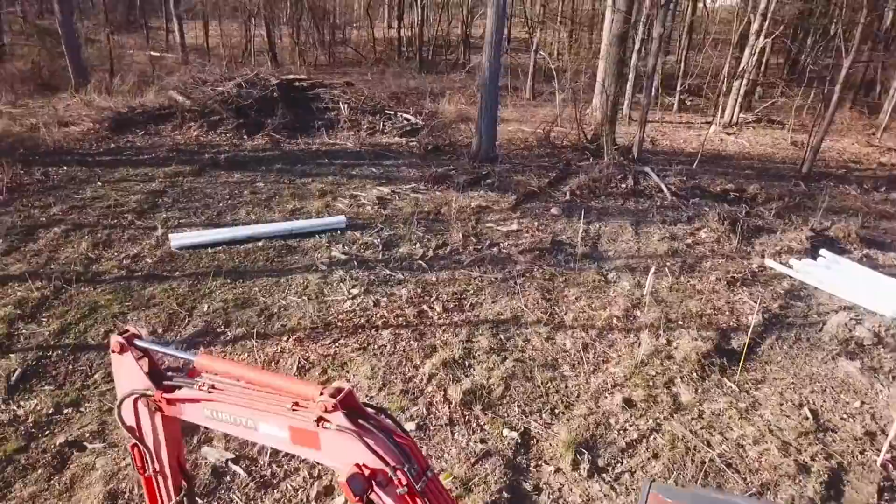Got a conventional septic system, 5 lines here. There's the house, here's the system, leach field, tank up here. Got 5 stakes in the ground, 5 stakes over there. These are going to be 50-foot laterals, conventional septic, so that means we are using existing soil. We don't have to bring in any material. We have the stone and the fabric and the pipe.

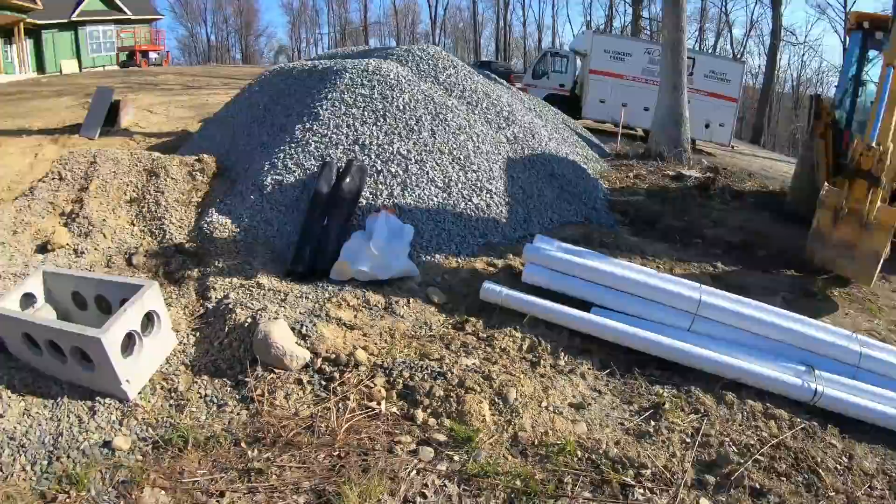There's a D-box. First things first, you are going to dig your D-box, set it to grade that you want, 20 inches in the ground, and then build this trunk, and that's where all your solid pipe goes in.

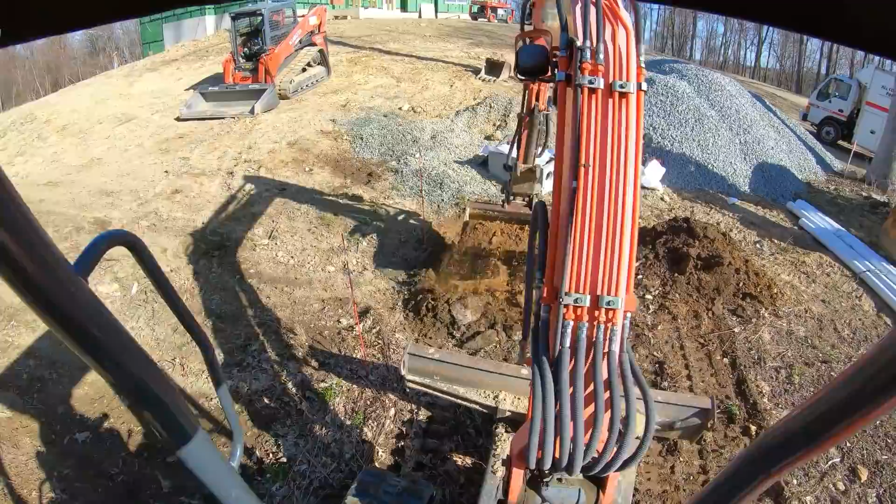First things first, dig your D-box in. It's going to be 20 inches down, like I said. You're always going to line up your first hole with your first lateral. Got the smooth 3-foot bucket on. We're going to switch it out to the 2-foot bucket. Gotta have your laterals 2 foot wide.

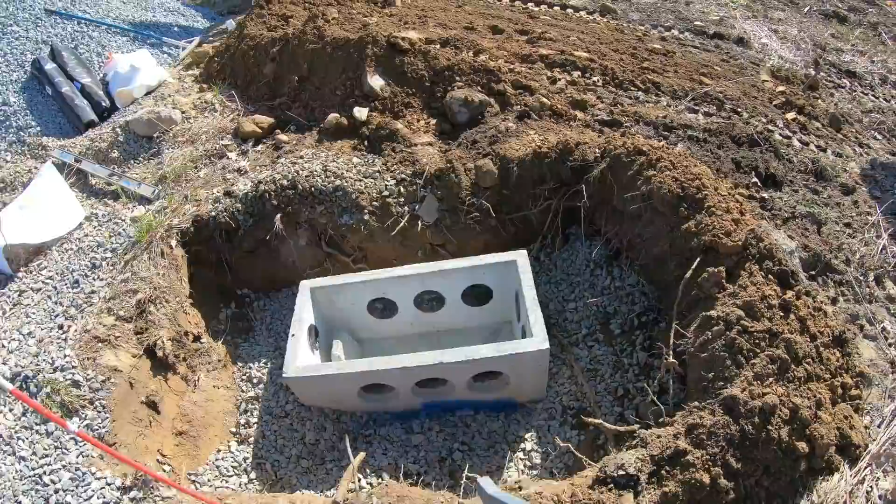Take a measurement. Alright guys, got the D-box in, 20 inches down, put 4 inches of stone in the bottom. I'm gonna take the rest of this stone here, come up to the bottoms of your outlets, and once you come to the bottom of your outlets, that's your depth of your trunk the rest of the way. Your pipe sits on the virgin dirt, just stone in the bottom of the box. If you're in sand, you could get away with just using the natural sand. You don't need the stone.

Got all my lines painted. Just hook a string line to this, to that. Paint nice straight lines, 5 of them, 50 foot a piece. Once we get this trunk built, your first one is always lined up here. This is your inlet right there from your tank. You're gonna come out straight. This one is gonna be tight 90 to the second or the third line, and this one will come across and then 90 this way. Just dig your trunk, go with the grade, 10, 12 inches, whatever it measures out for you.

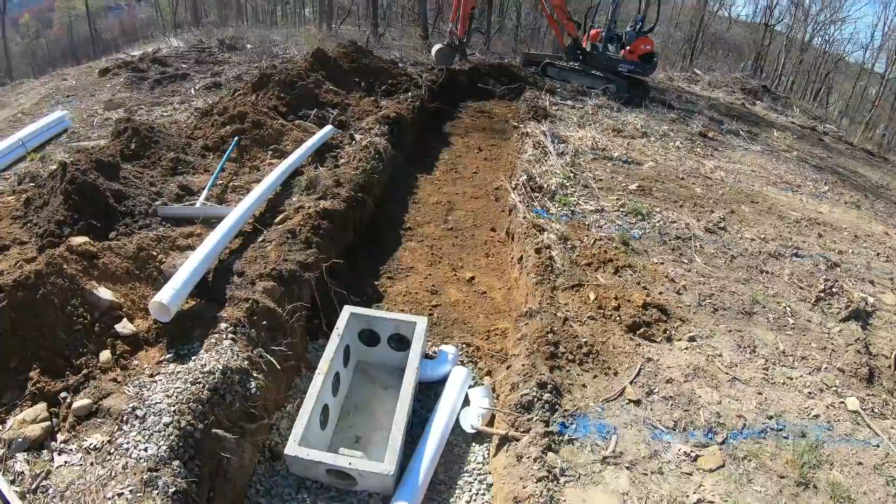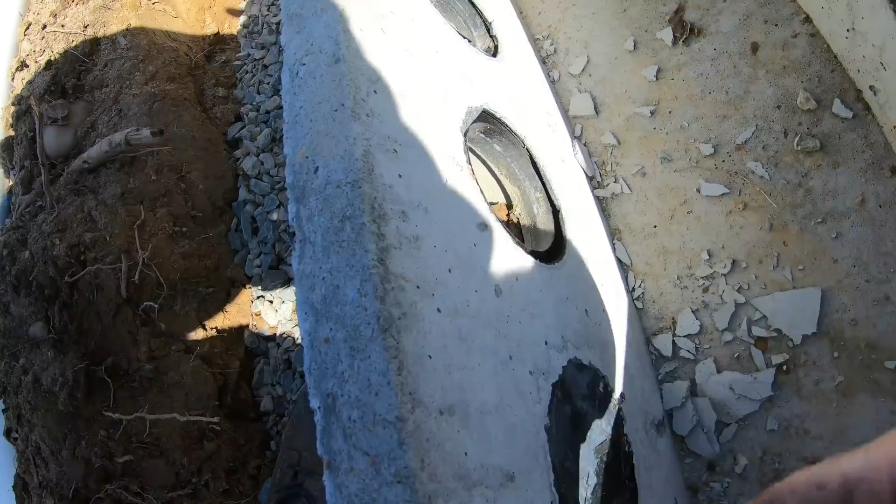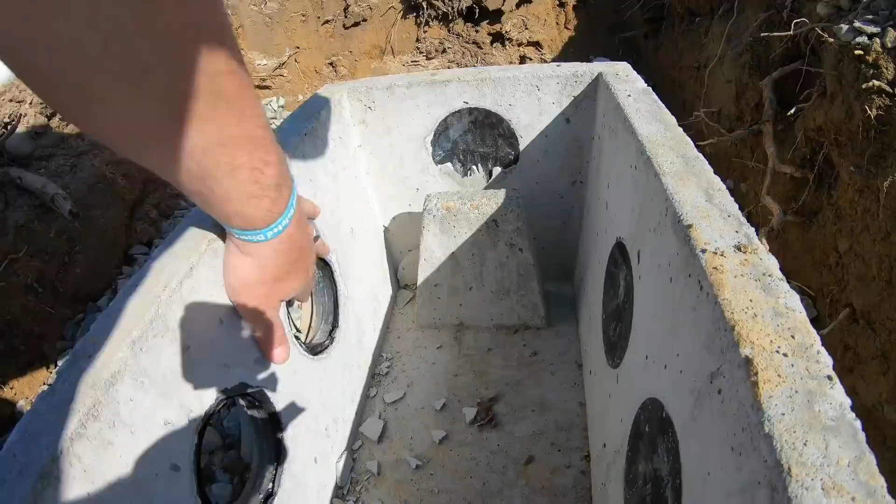All right, D-box is in, bedded in stone. Trunk is excavated. Now we're gonna build the trunk. You want solid pipe at 90s. Get your rubbers all cut out. Make an X, go around them like this. It's a rubber gasket. Get that cut out. Make sure you get enough so that gasket could seat. Otherwise, that pipe won't go in. Only do the ones that you're using, your inlet and your 5 lines. So 1, 2, 3, 4, 5. Do not do these ones. That's for your expansion if you ever need it.

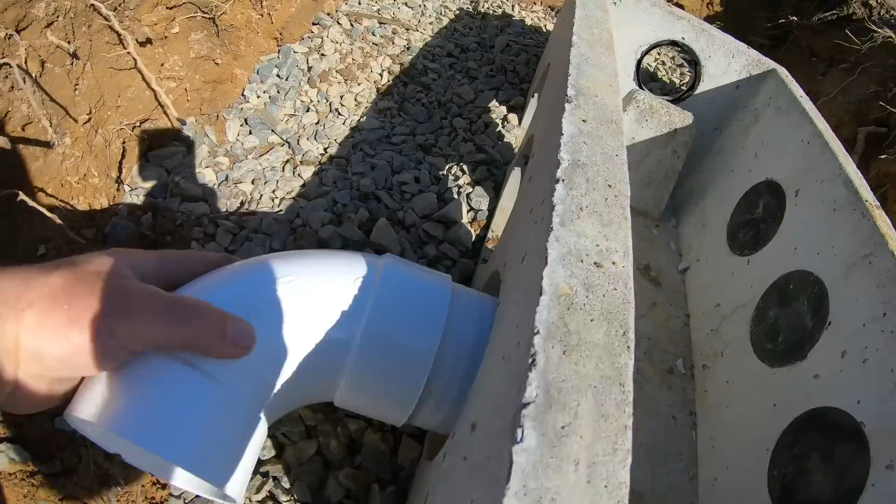All right, first line put in. I got a 4-inch piece I cut in there. Make this right tight so that 90 gets right tight to that. You want about an inch or so inside. You could always cut these afterwards, even if you have them this long, to true them up, straighten them out, whatever. But get your first 90 as tight as it could possibly go, which is there. Next piece was 9 inches, like so. Now you'll see this go by, and this one will go in here. All right, trunk is starting to go in.

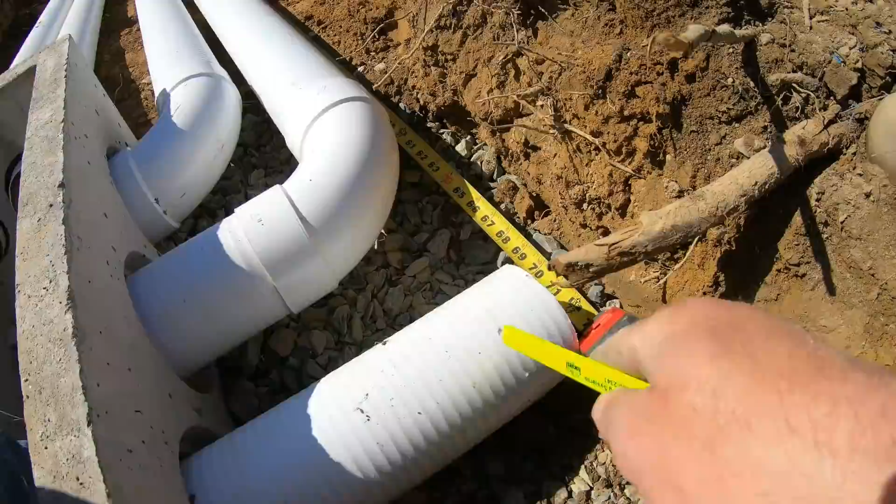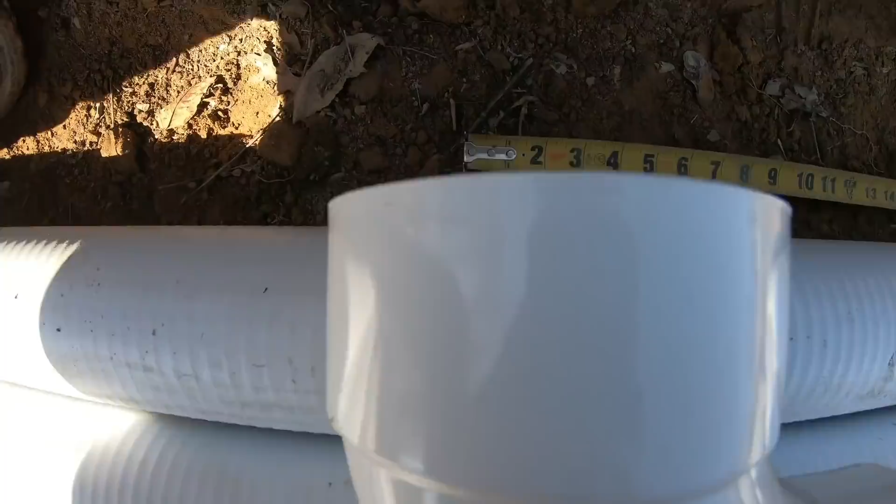Here's our first line that's going to go into here. So measure 6 foot on center. Put your tape there. This is your second line that has to be cut right here. Put a mark. That's where our 90 is going to go. So there's our 6 foot mark. That doesn't mean you cut it there now. You put your 90 in the center because that's your pipe. The cut is going to be right here where that hub is going to hit. Okay? And that's your center. Don't cut at your 6 foot. It's going to be cut there because you got to compensate. All right, trunk is all built, ready to go for my leach lines. Keep everything nice and true as I did.

And these move back and forth, and they're gonna move back and forth while you're working. You're gonna pin them all with some sand and stuff. One thing I do wanna mention, and each septic system I put in has little details different from others, so I guess you'll have to watch all 3.

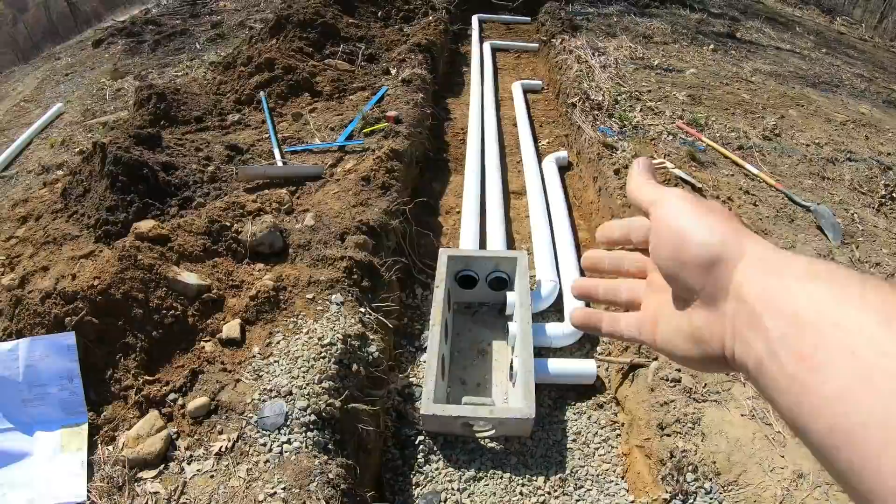But anyways, keep your lines coming out the front of that box. So each box is positioned different on each septic system, depending on the inlet and the way the field is faced. So basically, you got to keep these 3 that are for our expansion in case we ever need them, which that's the expansion area down there. If this system decides to fail, you could do 3 more lines and come out the back and into there.

If you switched it around and use the lines from the back, you're in trouble because you can't come out and then you're going to be crossing these lines. So always make sure you leave your expansion lines to the back of the box.

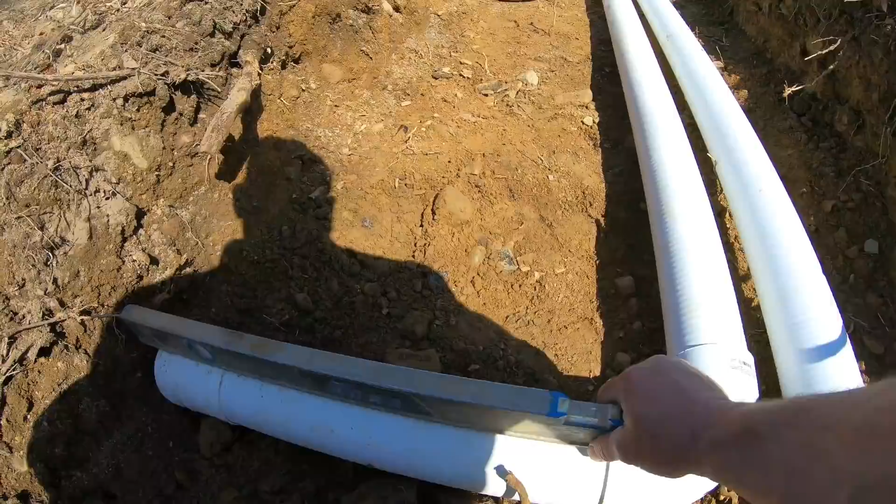Another thing to check before you start digging your lines, which that's the point I'm at now, is check these lines to make sure you got pitch going down. It only calls for 1/16 of an inch maximum. So, I mean, right there is way too much. So what we'll do is when we put that line on, we're just going to lift it up. But you want to make sure you're at least going in the right direction.

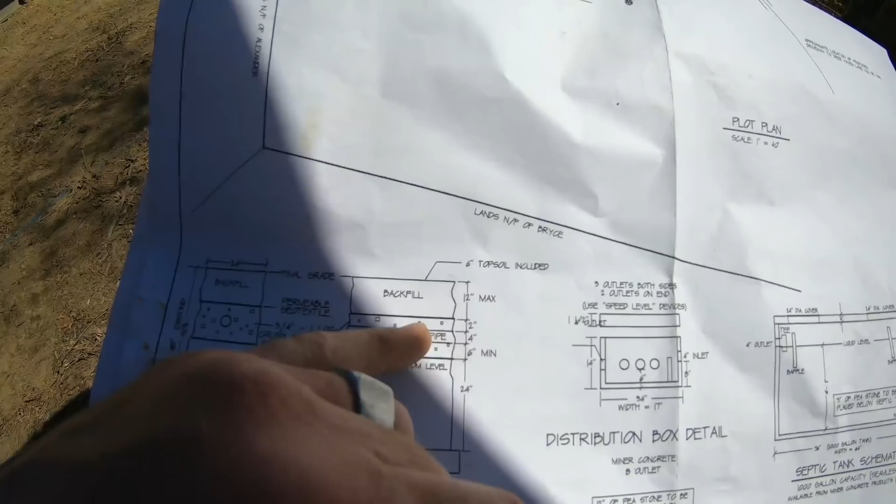All right, we're all ready for the trench. Got the laser on the boom. Here is the trench detail. So from the bottom of our pipe there, we got to cut down 6 inches because that's stone. We got 6 inches of stone under the pipe, then the 4-inch pipe, which gets all wrapped in stone, then 2 inches on top of the stone. So it's 12 inches of stone there, and then you backfill with the existing soil.

The first trench will put all the dirt to the right. The second trench, you put it right on top. After you put your fabric and pipe in and all that, you put your dirt right on top of the stone, or right on top of the trench, and then you leave your ends open so they can inspect it. That's around here. Some counties are different. They may want the whole trench open. So you gotta go with your codes, but this is how we do it.

All right, laser's on. Gotta go down. Green lights go. It's on top of the boom up there. I don't know if you can see it, but you definitely can hear it. Just gonna pull this as we go. Follow my blue mark.

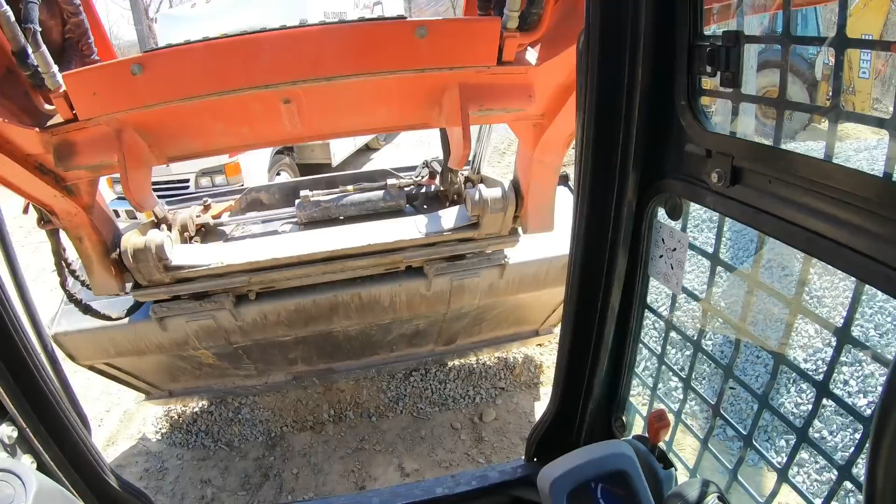Just fell, broke it into a bunch of pieces on the mount, so now I don't have a magnetic mount. If anybody knows where I get metal pieces for this stuff, put it in the comments. I gotta get a better system for this GoPro. I got all these plastic parts. All right, I'll hold it for this little bit.

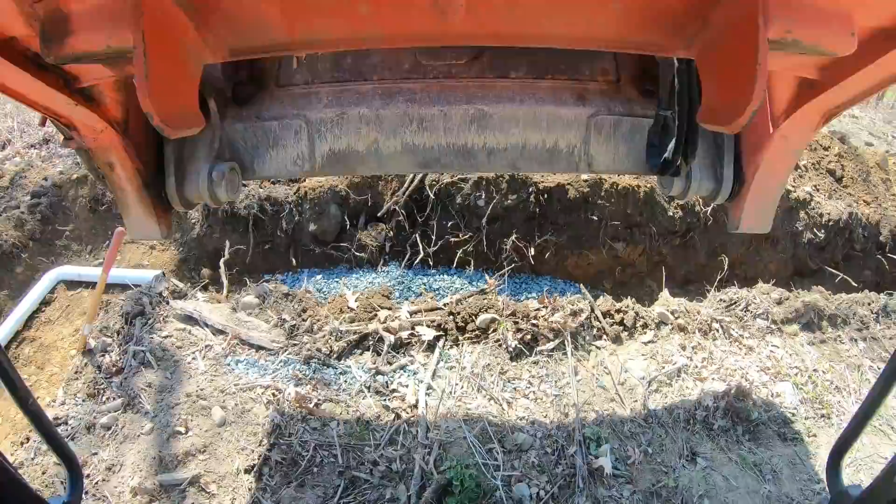Put 6 inches of stone in the bottom of your trench in piles about the width of the bucket. And do that 3 or 4 times, and our pipe will set on that, because again, we want 6 inches of stone. If you fill the whole thing with stone at once, you'll be raking and raking and raking. So just do piles, that way you can put the highs to the lows.

Okay, I got my stone set. My pipe is in, and it's just loosely in, obviously, just setting on top of the piles I made, as you see, and it could go left or right like this. It's better if you have 2 people to hold it for you. Some guys put rebar in like this to hold it.

If you have a tilt bucket like me, you could go on both sides at an angle and it will stay perfect. Double check the pipe. You set on top. There's dead nuts. You still want to be pretty much level here.

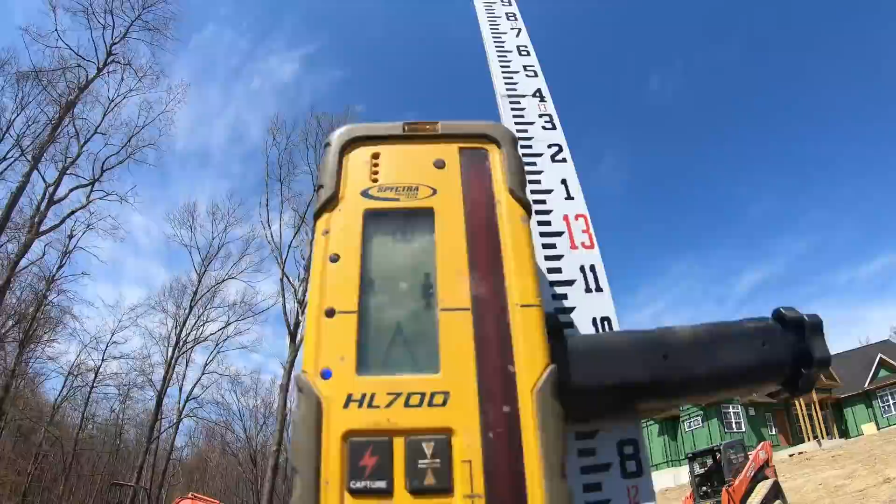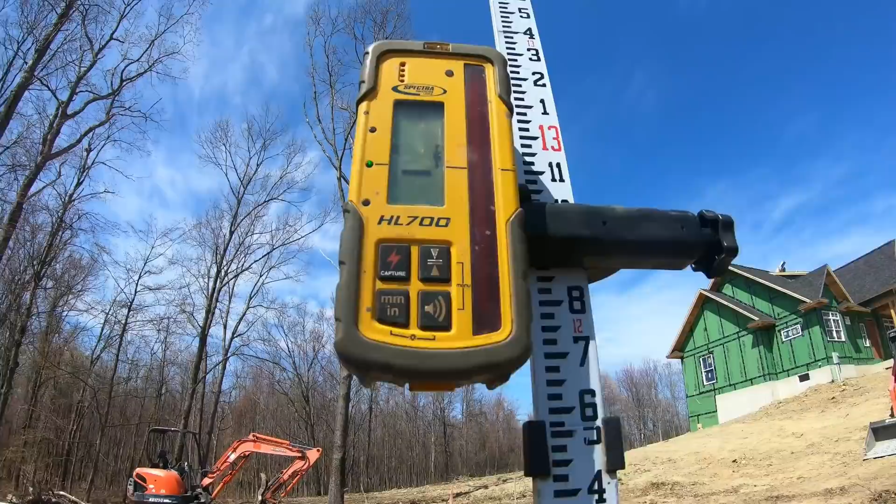And mine tells you exactly what I'm down right now. Says a 1/2 inch, so that has to come up. I only want that to be a 1/4 inch. When you get halfway in your pipe, you want that to be, say, 50%. Okay? Right there, it says it has to come up 0.5. So that means it's down 50%. Perfect. I say percent, but it's 1/2 inch.

And then at the end of this pipe, you want to be 1 inch minimum. You know, 1 inch to 1.5 inches is the best for this type of system. All right, but read your specs. Everybody's different. 1/16 per foot maximum. Okay, that's at your maximum. So on a 50-foot length, if you do the math, I don't know what it is, it comes almost to 3 inches. So we do half that, and that's what our inspector wants.

So right now my pipe is set. I'm just going to check this end just to make sure we're reading. Okay, this says it has to go down, so you take your stone, you scooch it around, tap it. I take my foot like this, cut a line in it, and it lowers the pipe right at the same contour as your toe, and it's the same contour as the pipe, so then it stays in there. It won't roll out.

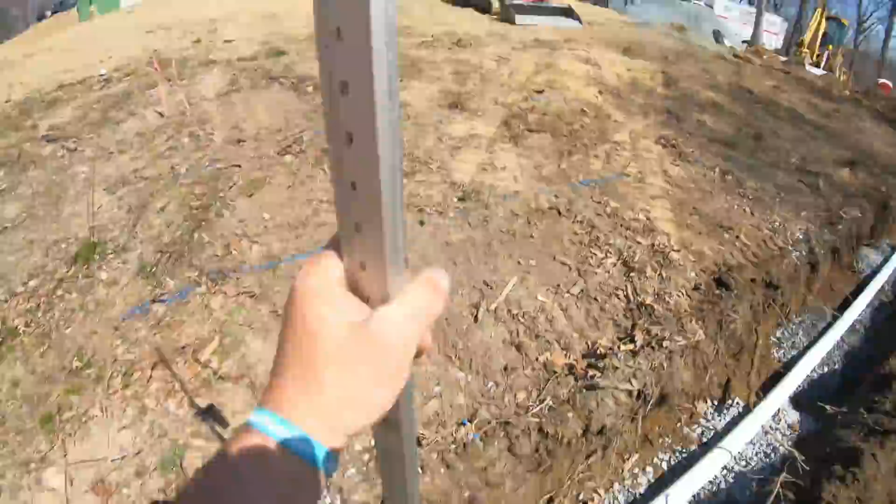1.5 inches, 1.5, perfect. Like I said, take your toe and scribe it in there, and then this won't roll. Oh, I'm falling down. Hang on. This won't roll. See how sturdy that is? And you could also take your stone and pat it, but go down through, make sure it's right.

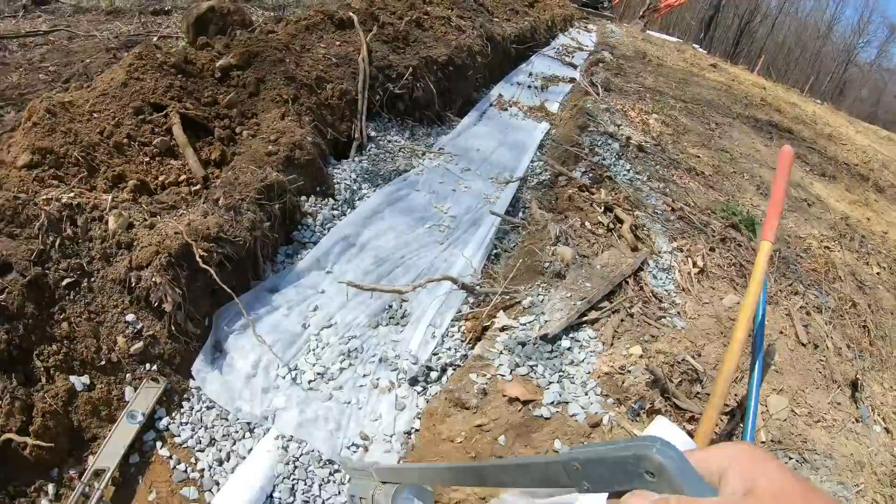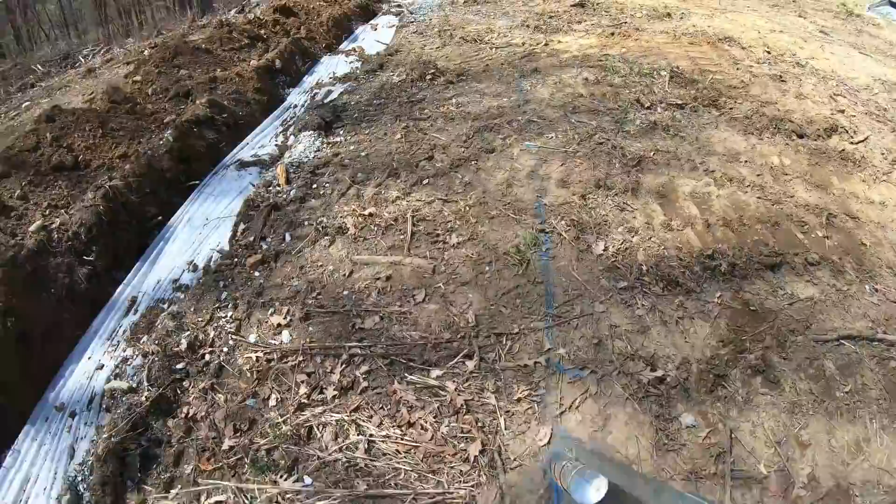All right, stone's all backfilled, 2 inches above the pipe, and then your fabric. And then you can take the dirt and pin the fabric down like that as you go, because that's what goes next. Once we dig this line, we take the dirt, touch up your lines like I am. We take this dirt and put it right directly in there. Leave your ends open though. All right, got 3 lines in. Fabric's in on this one. 1 line to go on the orange. Ran out of blue paint.

Like I said, guys, sorry for the lack of video, I should say. The GoPro mount has broke. All of them have broke. I have no more plastic cheap GoPro clips. Trying to find the metal ones. I know they're out there somewhere. Just don't have any, so this is what we got. Got one more line, like I said. Gonna get you in the air, finish this one out.

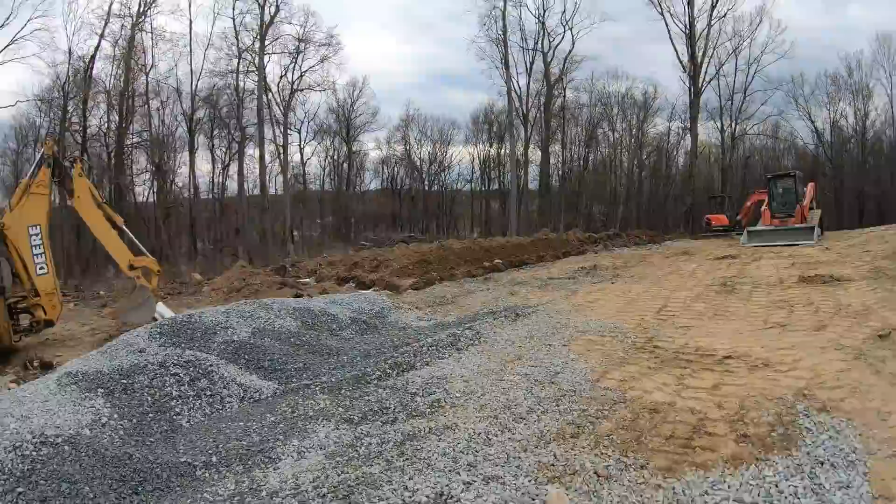All right, let's see what we got at the end of the day. Probably 5 o'clock anyways. Yeah, 5:22. So I started probably, I don't know, 8-ish. 5:22 now, got it all in. The leach field is ready for inspection. This is called the trunk.

And like I said, guys, if you want to see a detailed video on every step of measurement, you got to go to the playlist. I want to put a playlist because I got another septic system to do next week. So I'll get a playlist going. Then there'll be 4 septic systems in there for you to get every detail. Like I said, the GoPro had some faulty issues today, so I couldn't get everything. And I wasn't going to do a detailed video on this one anyways because I already did 2 of them pretty much that were to spec. This one was for enjoyment.

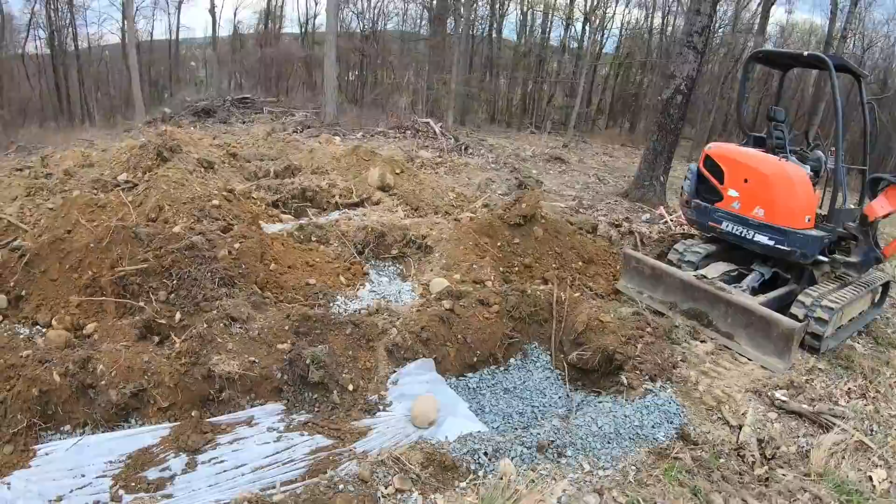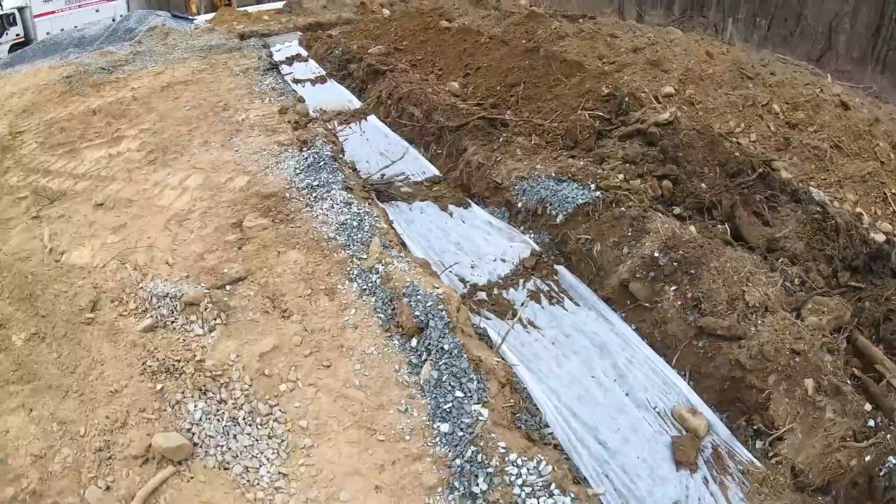Leave your ends open like that with the caps. Then he's just going to take his instrument and do those ends, do these ones, and make sure everything is perfecto. Gotta leave this one open because we don't have no dirt. The dirt is on the other side. Remember, that's the first one. So when we go to get the okay to backfill, when he's here, we'll throw some water in here and we'll adjust these speed levelers right here.

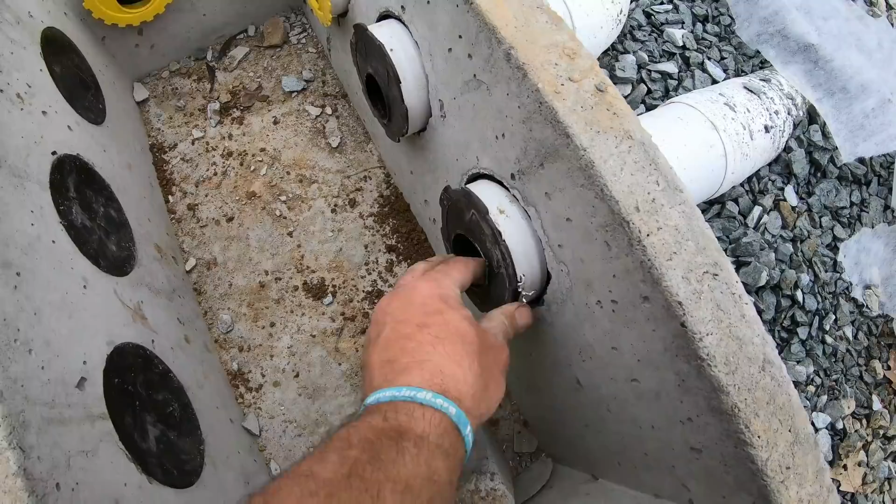Which, if your tank is level, you should have no issue. They'll all be at the bottom. But what happens over the years, things creak and settle with Mother Nature. You can come in and adjust these. And if one fails, you can get rid of it. Or if you want to take more, you just turn the dial.